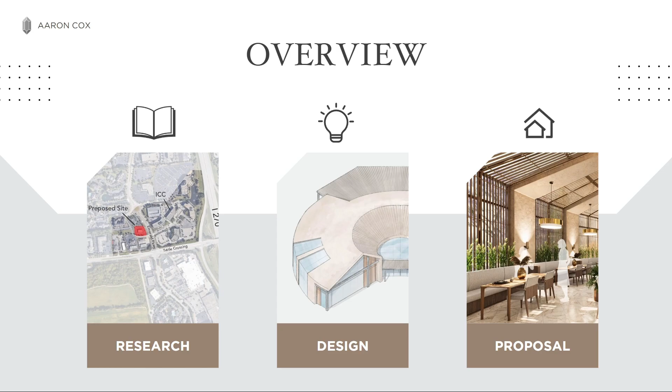In terms of research, we'll first be looking at identifying a problem to solve for, a specific design brief, the people the design will need to consider, guidelines to keep the project focused, and lastly, the site I propose this concept on.

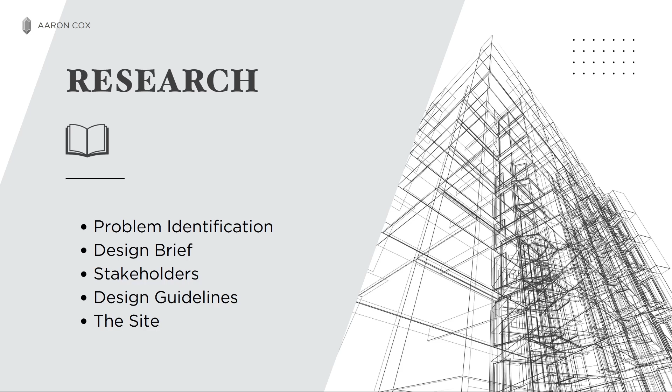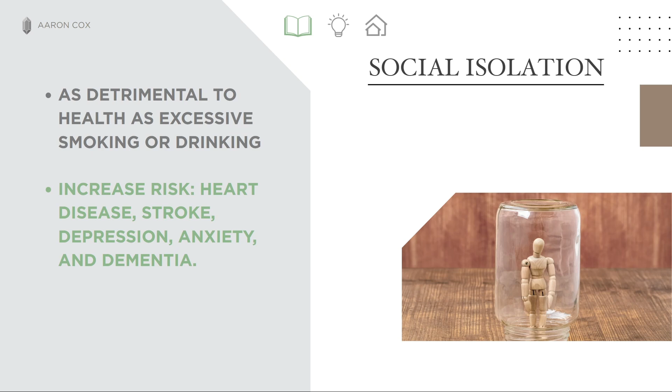One growing issue is social isolation, or more precisely, a lack of quality relationships and connection. Studies have found that lacking quality connection could be as harmful to your health as excessive smoking or drinking. It's linked with an increased risk of heart disease, stroke, depression, anxiety, and dementia. It costs the U.S. healthcare system $6.7 billion annually in excess Medicare spending, and it's a key determinant of a community's health, safety, resilience, and economic prosperity.

But what can be done about this? It's a massive problem and no one design can solve for it. However, one way sociologists suggest to help combat this issue is to promote more informal face-to-face interactions. And this takes place in spaces that are often called third places.

Third places are informal gathering places outside of home and work where conversations happen, casual friendships are formed, and people build a sense of belonging in their communities. Think of places like cafes, restaurants, parks, or local markets, spaces outside of home or work where people in a community may run into each other.

But for the sake of this project, I decided to narrow my focus on cafes. Historically, cafes have played a key role in fulfilling this need for community spaces. They have served as meeting spots where individuals can step away from their busy lives, relax, and connect with others.

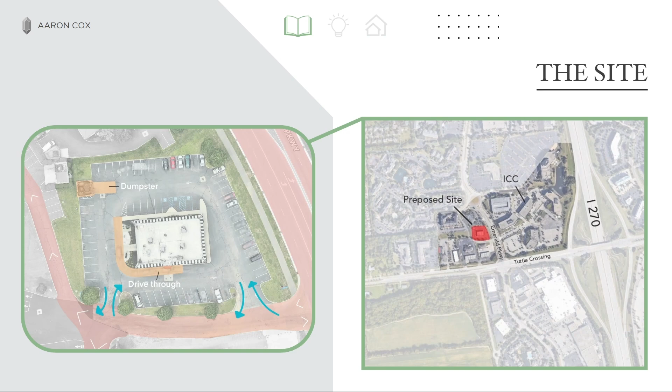For this, I chose a vacant Steak and Shake lot just across the street off of Emerald Parkway. I chose this site because it's in close proximity to where I live, making it easily accessible. It's also a good sized lot for a cafe.

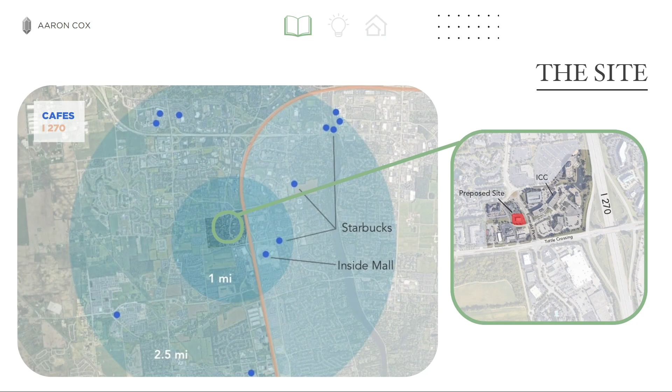The site is also right off of a busy exit off of 270, and as you can see from this map here, there are not many cafes nearby, with the 2 closest being on the other side of 270, one of them being in the middle of a mall, and the other is a Starbucks.

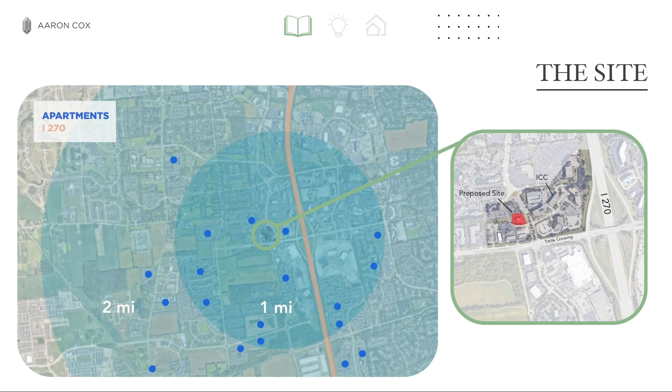In addition, this site is near several apartment complexes within walking distance, with new apartments even being built just outside this building. Access to third places increases neighborhood quality of life, meaning a good cafe would increase the quality of life and the value of the apartments in this area.

To quickly recap, cafes are often split between 2 conflicting roles of trying to be a workspace and a meeting space, and I propose a cafe that bridges this gap. This cafe will be designed in the vacant Steak and Shake lot.

With an idea of what to design for, I could begin the actual design process of the cafe. For this, we will be covering an architectural concept, the branding and aesthetic of the cafe, the requirements this building will need to meet, and the actual ideation of the site and the building.

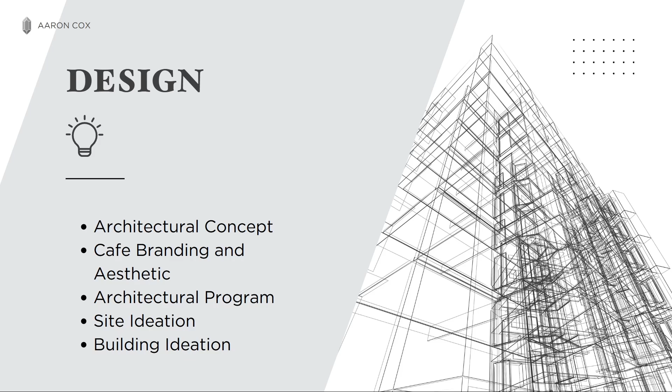To help direct the design process, a concept was made. These help to encapsulate all the key insights from research, distilling it into one image. For this, I chose a community bonfire, which is a warm and cozy, multifunctional space that welcomes in people with its light and warmth, encouraging spontaneous connections, relaxation, and community engagement.

My cafe needs to embody this image. Within this concept are 4 drivers for further inspiration. The space needs to be a space of transparency, it needs to promote connection, it needs to be a sanctuary, and it needs to be multifunctional.

For the aesthetics of the exterior of the cafe, warm color palettes and circular forms were included to instill the concept of a bonfire into a building, along with features like roofs merging into the walls and large windows for transparency.

For the interior, I wanted to include features like hanging ceiling elements and clouds, large floor-to-ceiling skylights to make an open space, along with indoor greenery to make a more calming and relaxing place.

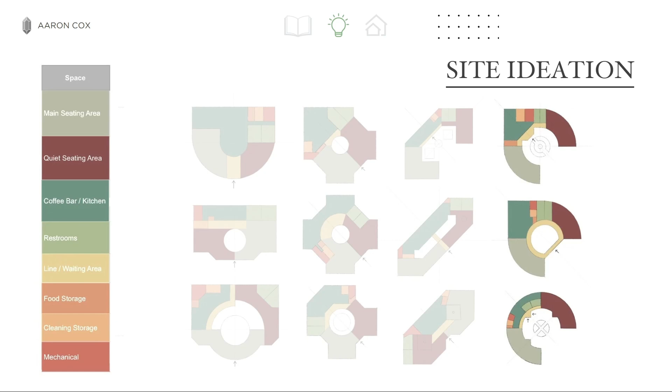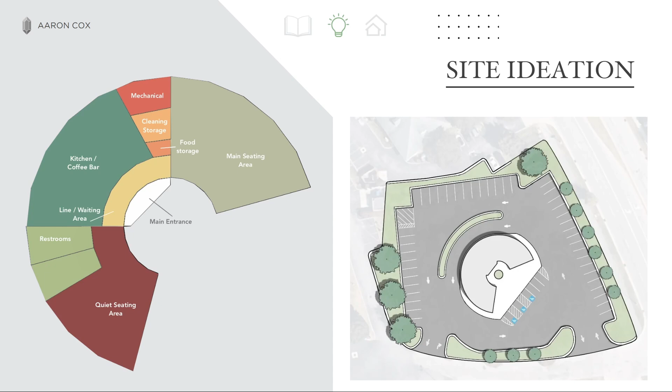In the end, this circular concept was chosen, pushing the kitchen and the drive-thru to the back of the building and to the back of the site, with the two seating areas separated on the two wings of the building. However, this floor plan would be further developed as the building was developed.

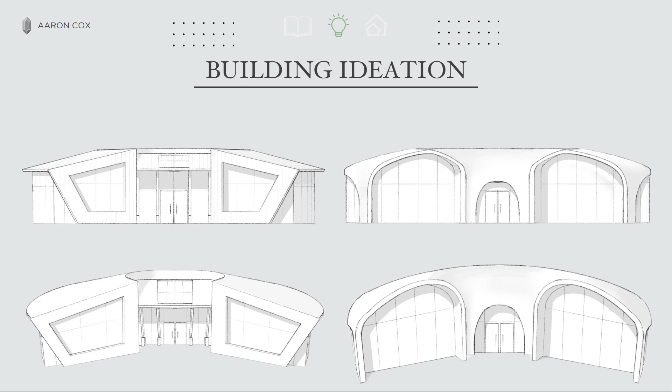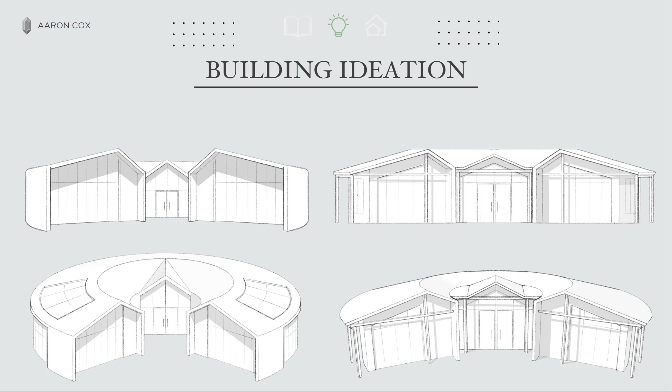Getting into the exterior, several ideas based on the circular footprint were entertained, from more wild organic forms to designs of central domes and a central focus. However, integrating skylights and large windows for the seating area was an important detail in order to meet the design drivers. In the end, this simple design was chosen, with large windows and a simple gabled roof to create a more airy and dynamic interior space.

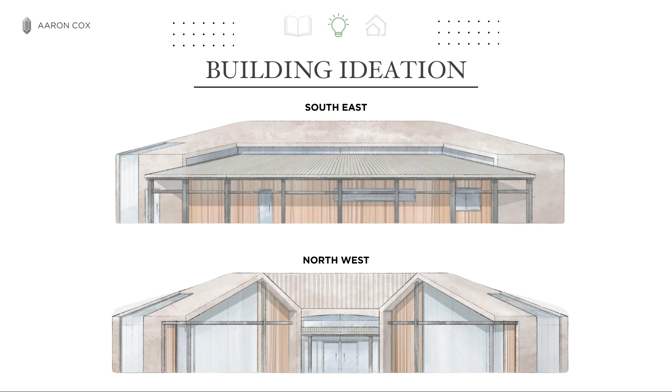Going into more detail, this design has large front windows for the two seating areas, along with multiple skylights to bring in natural daylight throughout the day. In the back, it has a covered drive-thru, and you'll notice the drive-thru patio extending from the building follows a circular form, creating a pocket for extra windows over the kitchen to let in even more natural daylight.

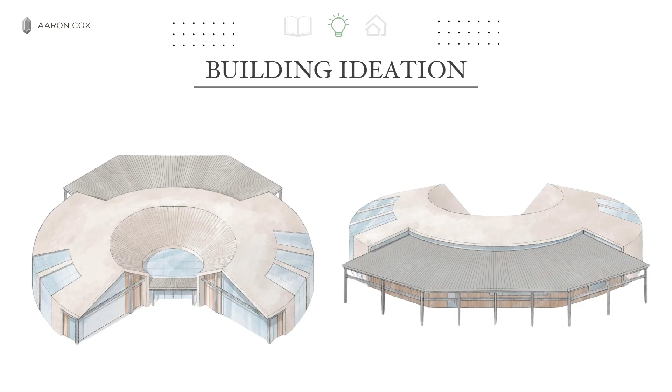Moving to the interior, several ideas were explored, primarily experimenting with different kitchen arrangements. I ended up opting for a 45-degree cut on the back of the kitchen instead of a circle in order to have more practical interior space.

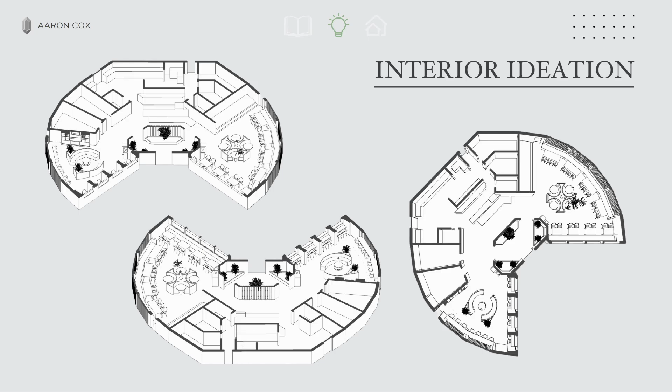In the interior, I experimented with how to effectively integrate the skylights into the design, a central tree, and how to balance comfortable with efficient seating arrangements. And in the workspace, I experimented with how to implement the large work surface near the windows, a comfy fireplace seating, and even space for a miniature library.

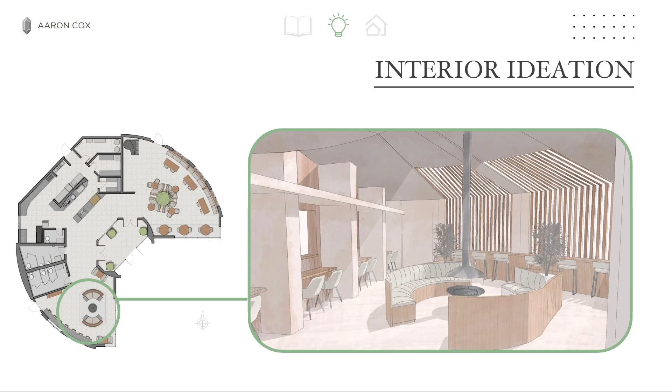Here you can see the chosen floor plan. It's broken into 6 main areas, each given a different color that we will break down in a second. It has the 2 seating areas on the 2 wings of the building, centered around the kitchen and the sales counter.

In the front, you have the main entrance leading to the front counter, where you can place and pick up your order. Behind this is the kitchen, with coffee brewing equipment up front, food prep and dishwashing station in the back, and a drive-through window in the bottom left corner. Adjacent to the space are the mechanical and storage rooms up top for food and cleaning supplies. On the bottom is the employee bathroom connected to the kitchen, and below this are the public restrooms.

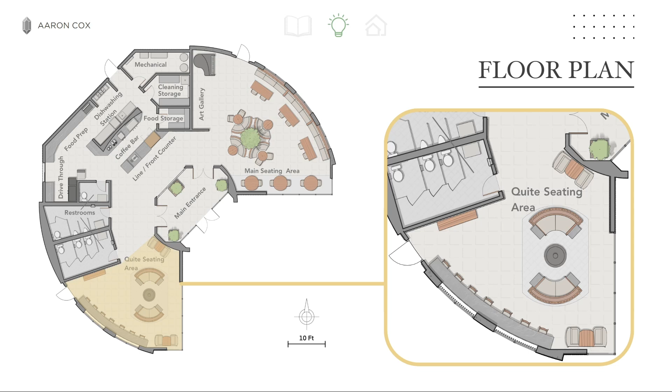On the top wing of the building is the main seating area with a tree in the center. To the left of that room is a local art gallery and a couple instruments for events. Lastly, the bottom wing is the quieter seating area for studying or relaxing. It contains a small library for customers to read around the fireplace in the middle of the room, and along the windows are large work surfaces with plenty of outlets for studying or working.

Now, without further ado, I am proud to present to you the Emerald Café.

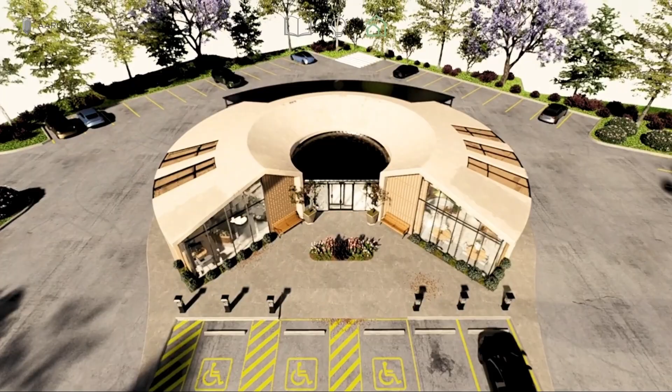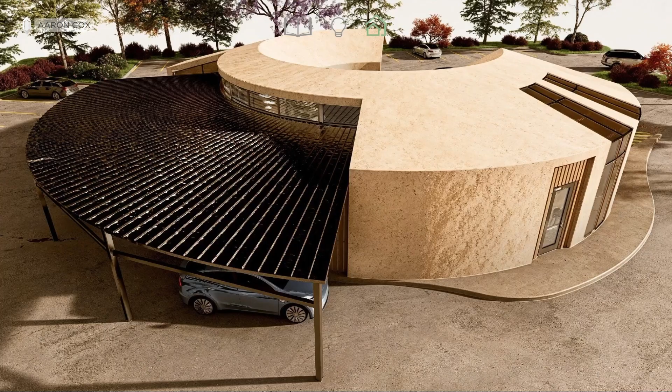From above, you can see the full site with the entrances and exits on the bottom and the drive-through in the back of the site. The main entrance sits between the two seating zones, forming a cozy courtyard with landscaping and benches in the middle. At the rear of the site, a canopy shelters a drive-through lane, keeping the experience comfortable in inclement weather.

Now, approaching the site, guests are welcomed by the front facade where you can easily find a place to park.

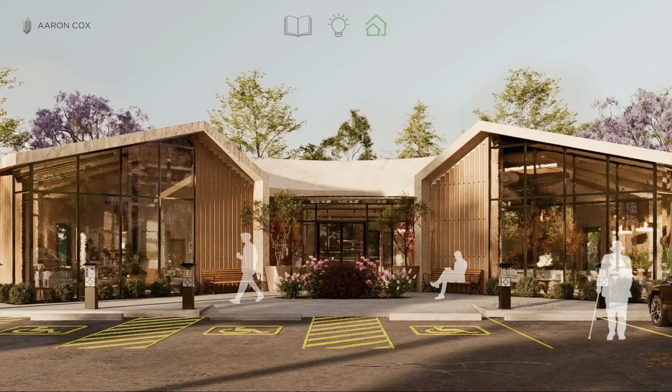Once they park, the large windows along the front facade offer clear sight lines into the cafe, helping to connect the indoors with the outdoors.

In the courtyard, there is room for outdoor benches and greenery, providing space to meet up with friends or simply enjoy the weather. As visitors come and go, the courtyard provides a chance for encounters where brief conversations can spark naturally among strangers or neighbors.

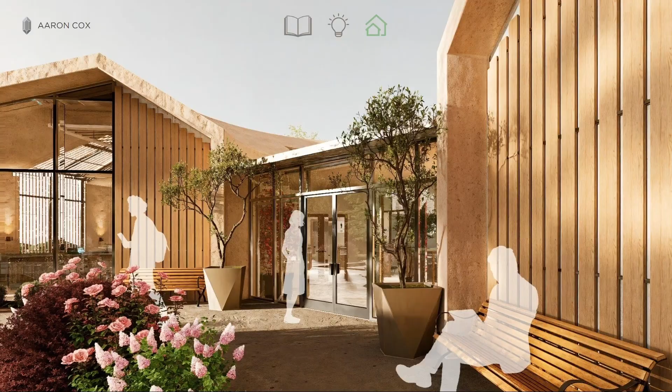Moving indoors, daylight pours into the cafe through the large window over the counter. Here you are greeted by staff and the smell of fresh coffee, and here you can place your order. While waiting, there's plenty to keep you occupied, from local artwork scattered along the walls to the mosaic accent wall, all bathed in natural light.

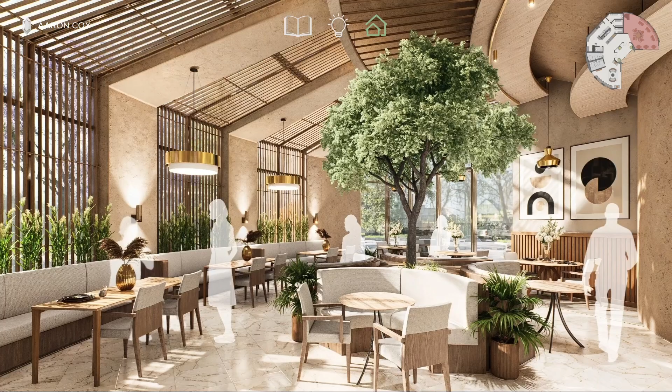From here, guests can head towards the main seating area. This space is alive with voices, where groups gather, conversations spark across tables, and laughter drifts in the air. The tree planted at the heart of the room draws the eyes upward towards the skylights above, where they filter in soft daylight across the room.

Towards the back of the space, tables along the large windows offer clear views outside, while soft booths wrap around the central tree, creating quieter nooks within the open room.

Along the rear wall, rows of booths sit beneath skylights, where vertical louvers help soften incoming daylight, creating a bright but calming atmosphere.

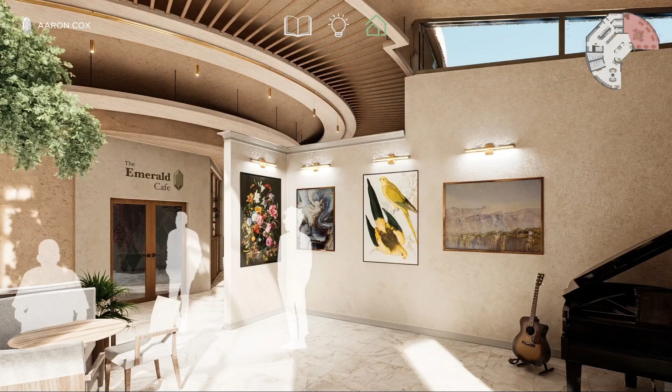On the front side of the seating area, an art gallery featuring the best work of local artists cycles every month, offering both visual interest and a celebration of the community's creativity.

Moving back towards the sales counter, the vestibule to the left is full of windows, bringing in even more light, reinforcing the sense of openness between indoors and outdoors.

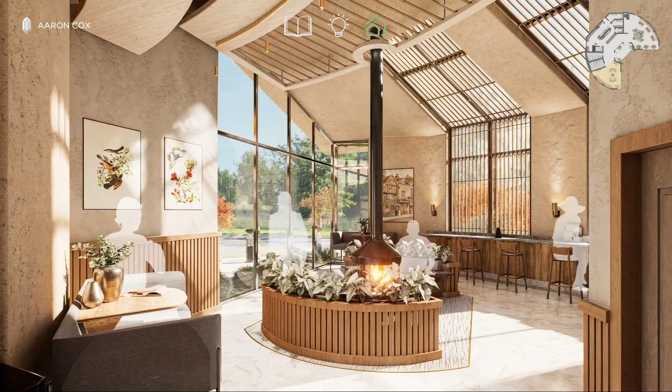From here, guests can choose to head into a quieter seating area, designed specifically for studying, reading, or relaxing. Large windows here continue the theme of daylight, while warm finishes create an inviting, cozy environment.

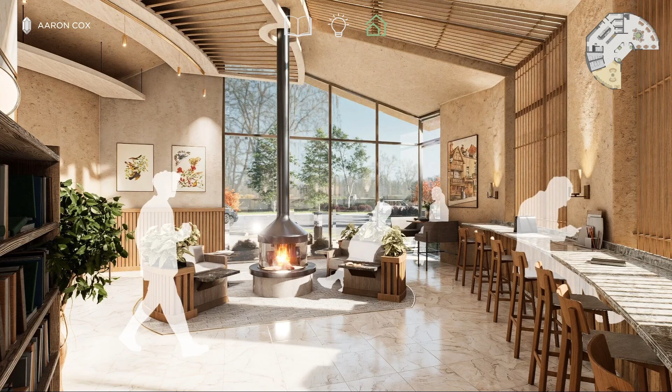Along the wall, generous counter space offers room for laptops, notebooks, and coffee, with plenty of outlets for devices when needed, while maintaining a quieter, steady volume to help you stay focused.

Towards the back of this room is a small bookshelf where guests can grab a book and settle in by the fireplace. Whether you're studying or simply seeking a place to relax, this space offers a warm retreat from the pace of daily life.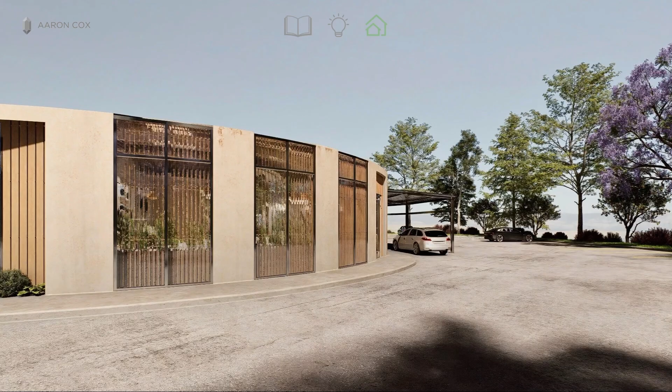When it's time to leave the building, and maybe a second cup of coffee sounds tempting, there's no need for you to head back inside. Visitors can simply pull around to the drive-through lane at the back of the site, and here you can quickly order, get your coffee, and be on your way.

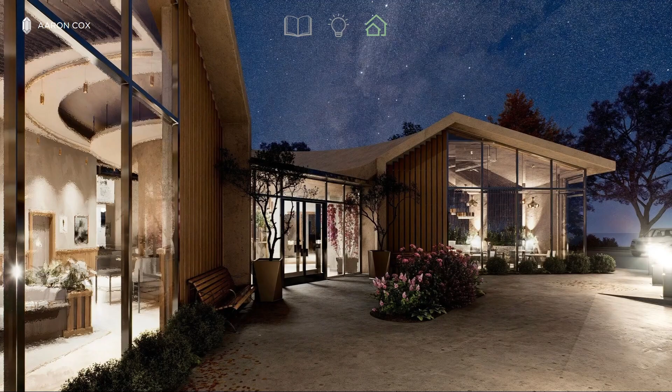However, the Emerald Cafe doesn't close after lunch hours. In the evening, when more guests are off work, events like book clubs, game nights, and small performances are hosted that help bring the community together. These gatherings give individuals with shared interests more chances to meet, to converse, and to deepen community ties in an informal, face-to-face setting.

In summary, this space bridges the gap between productivity and social meeting places by providing spaces for both needs, so as not to create a still, library-like environment for the communal space, and to not create a loud, distracting environment for the productivity space.

Whether you are there to meet with a friend, work, relax, or just grab a cup of coffee, the Emerald Cafe provides the space and amenities you need.

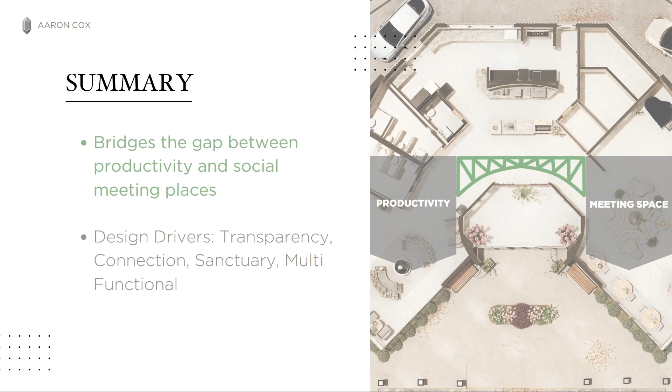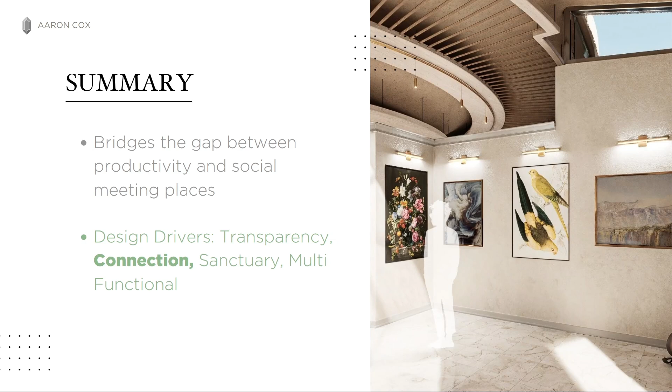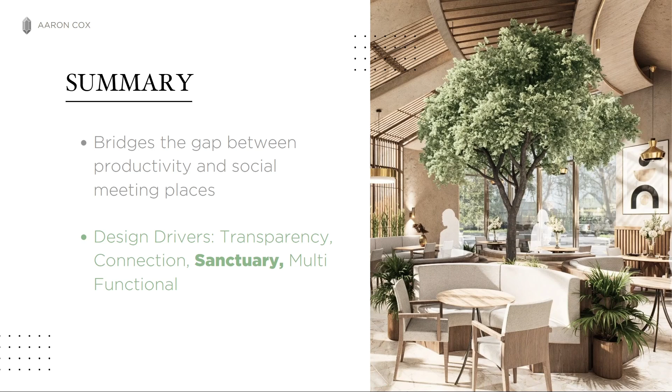The Emerald Cafe encapsulates the design drivers by providing transparent space through abundant windows and skylights. It promotes connection to the community by celebrating local work. It provides a place of respite from work and home to unwind and relax through its soft, inviting atmosphere. And lastly, it's a multifunctional space, providing amenities to diverse user groups by providing the spaces they need.

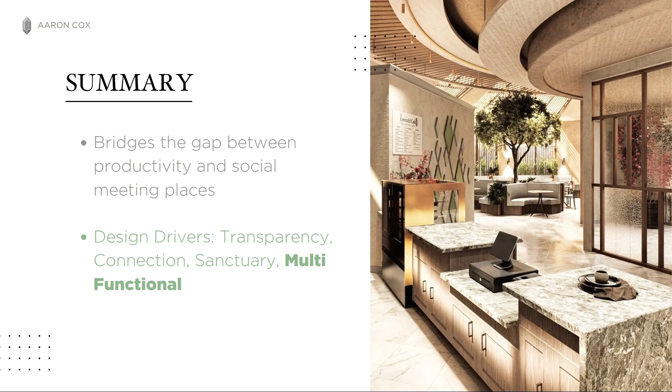The Emerald Cafe encapsulates the idea of a community bonfire through inviting people in with its warmth, providing a place where friends can meet, neighbors can bump into each other, and colleagues can strengthen relationships, promoting more informal, face-to-face interaction and deeper community engagement. Thank you for watching.